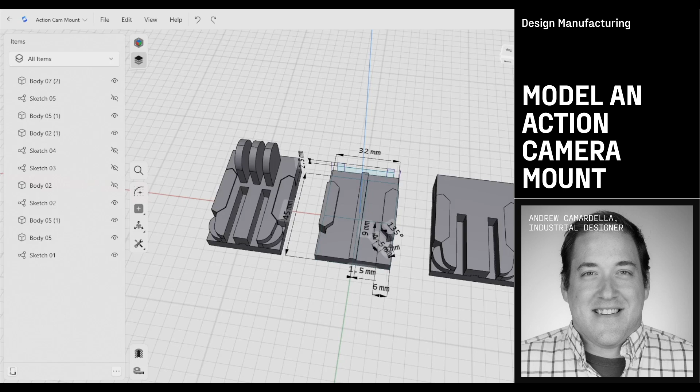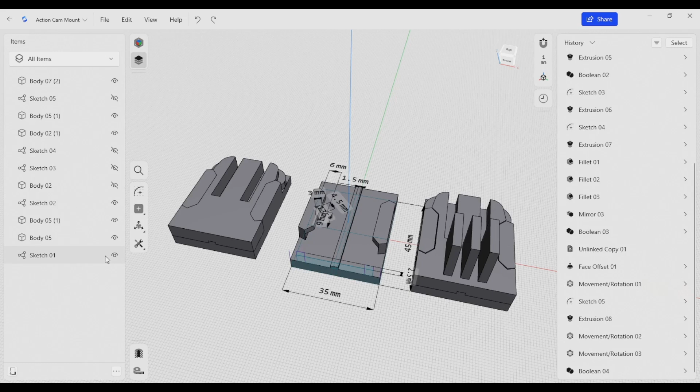In this video, we're going to take a look at setting up sketches to create an ideal 3D model that allows us to adjust geometry as we improve our model. We're also going to take a look at a few tools that have been improved or added since Shapr3D's latest update. To cover the main topics in this video, we're going to be 3D modeling an action camera mount.

Let's get started. We're going to start up a new file here. So we're going to need to start making our first few sketches to help define the overall part. We're going to focus a lot on sketches in this tutorial. We're going to try to make something that is editable, and that's going to allow us to alter the design overall as we refine it and as we decide we want to make changes.

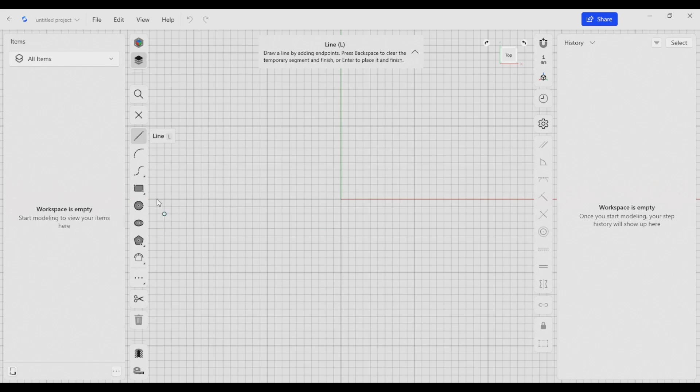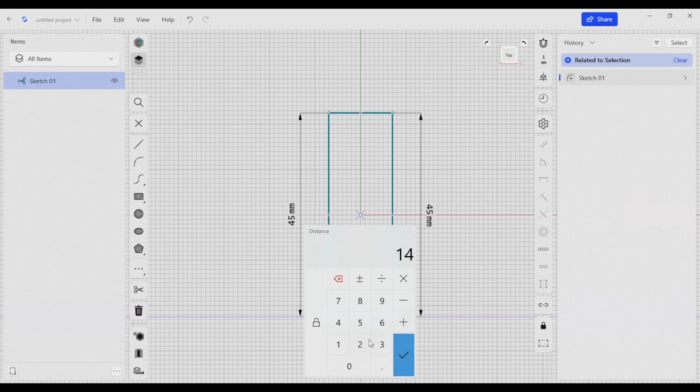The first thing I'm going to do here is start by creating a center point rectangle of the overall dimensions of our part. So I'm going to just really quickly rough out the overall dimensions, and these things are going to get refined over time. So I don't need to be super specific at this point. We're just setting up an overall sketch here to give us some good base models that we can start working from.

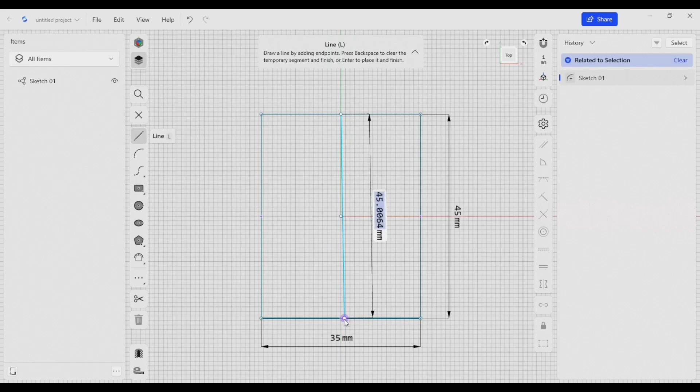The thing that we're working on is a two-piece camera mount. So there's a base component and then there's a top component that clips into that. I'm going to start building the base component first, and we have our overall dimension here. I'm also going to draw in a couple of other things like our center line. And I'm going to make something that's symmetrical, and that's going to make it a lot easier for us to edit as we move along. That way we only have to change dimensions in certain places when we're building this model out.

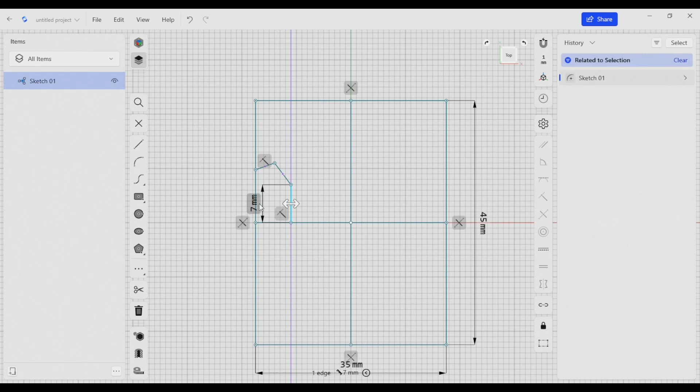So I'm just going to quickly rough in some dimensions here. This dimension here is 9 millimeters. As we move around, I'm adding dimensions. I'm also going to start adding constraints. Shapr3D does a good job of automatically adding certain constraints in. It makes our lives a little bit easier. I'm going to add a dimension here. We're going to call this 4.5. We're also going to click in here and call this 3.

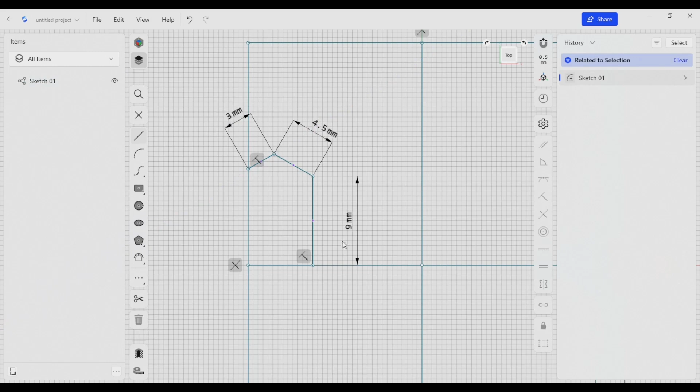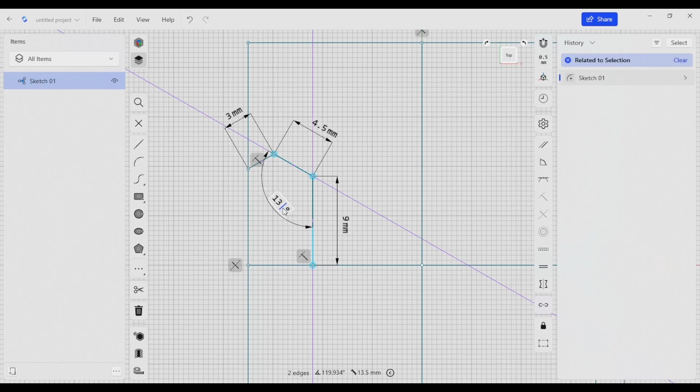One of the nice things about these new dimensions is that we can actually set which direction they're going in. So I want this to be a vertical dimension here, and that's just going to help keep things organized and in the correct orientation. One of the other things I want to do here is add some dimensional constraints for angles. So I'm going to make this 135. And you can see with that, I'm starting to get a little bit of skew here. So I'm going to just make sure that these dimensions are correctly located.

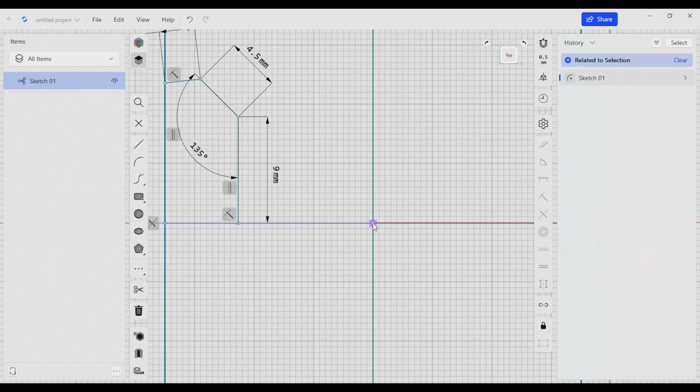I'm going to say that there's a vertical constraint here on this line. So I'm going to add a new vertical constraint here. And I'm also going to move this back to our center point. That right there is going to be 6 millimeters. And that completes that section of it. We're going to use our mirror tool once we create a solid to help us create this component.

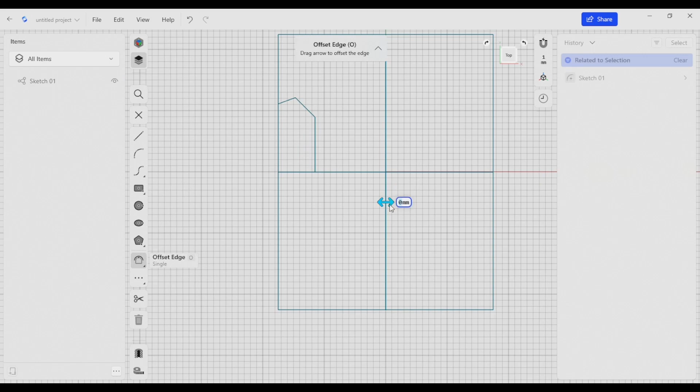I'm going to also make another vertical line here, and the thing that we can do is create an offset line. So I'm just going to click in the more. I'm going to create an offset edge, and I'm just going to slide this over and call this 1.5 millimeters. I want that dimension to stick around, so I'm just going to click and drag this here and enter. So now that dimension sticks. And that gives us our basic layout of our part.

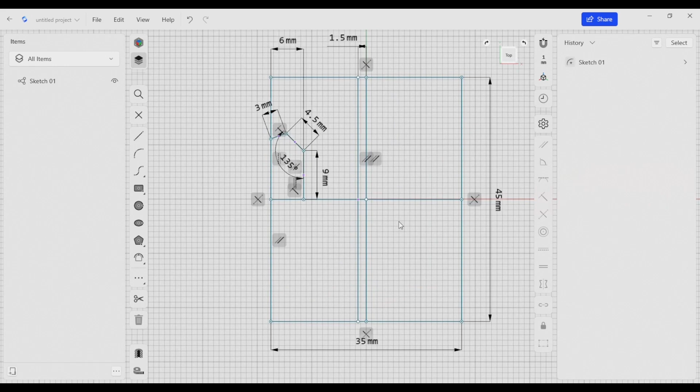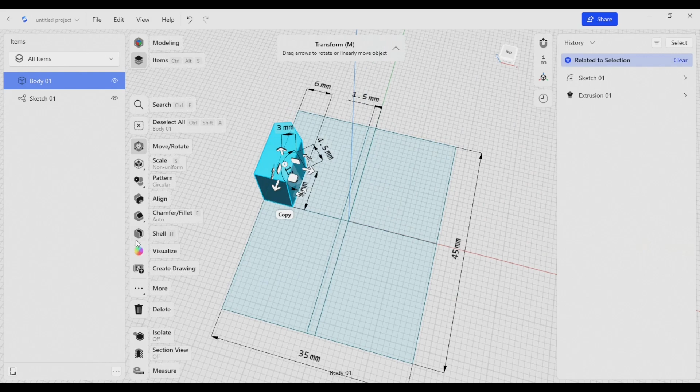So the very next thing I'm going to do here is start creating some solid extrudes. Now that I have these areas, I can click and drag them and move them around. So I want this height here to be a total of 11 millimeters. And I'm going to just take this part, and I'm going to make a duplicate of it by creating a mirror. I'm going to mirror along this face here. I'm going to click done.

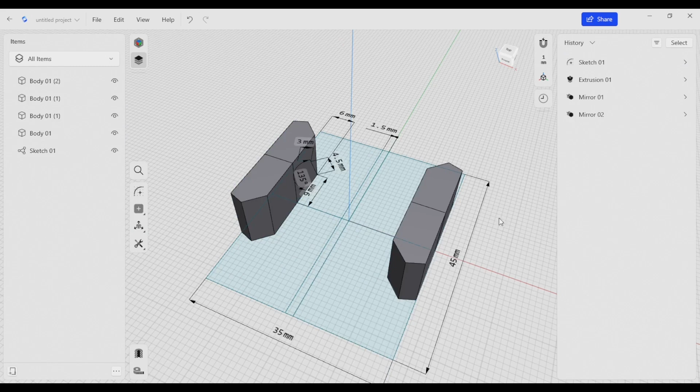And I'm going to mirror that one more time to mirror it across to the other side. I'm going to click on more, click on mirror, and I'm going to select this center plane right here in order to give myself some symmetry there. So now I have these 4 bodies, and they actually are all going to be the same piece. So I'm going to hold off to make them a union until I get this bottom section figured out. So I'm going to make a base plate that connects all those pieces together. I'm going to make that 4.7 millimeters.

And you can see now that we have 5 pieces, we're going to end up connecting all of those things together.

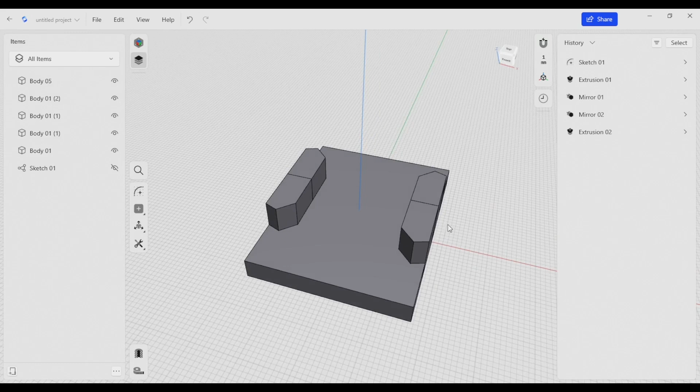The last thing I want to do here is also extrude another component. So I'm going to hide this last body that we made, and I'd like to make a little rib that goes through the middle of this component. I'm just going to lift this up here.

I'm going to call that 6 millimeters total height. So what I've done is measured from the very bottom plane and extruded everything up, and that gives us our total height. And what I'd like to do is also copy this and mirror this over.

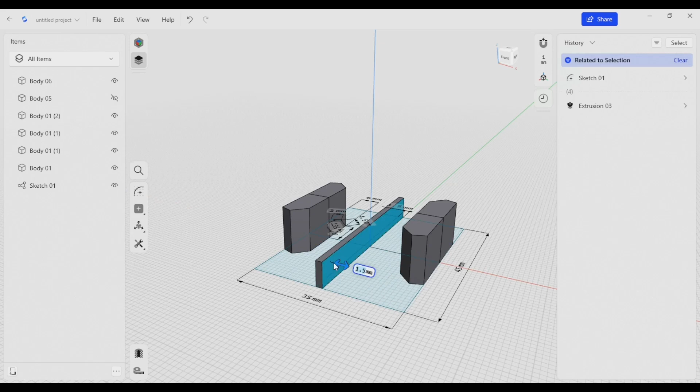So I'm going to use our history tree here to move some things around. I'm going to move this last extrusion before our mirror, so our mirror now is after the middle extrusion. And I'm going to add that extrusion to our target bodies. That way we get a nice symmetry with our components.

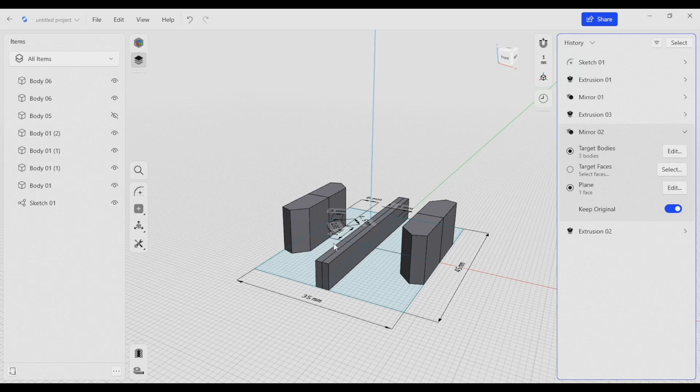That way if we change anything about the sketch originally, everything updates automatically. I'm going to bring our last extrusion back here, and that gives us our total design. So at this point, I can start booleaning everything together.

I'm going to select everything. We have our top panel there that allows us to filter what it is we're selecting. I'm going to just tab over and select bodies, and now I'm going to union all of those pieces together. Now we have one single solid body.

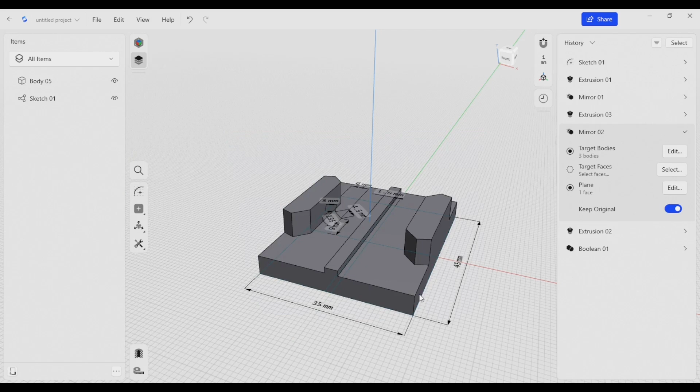The other thing I want to do here is to cut a little relief here that allows us to slide a clip in along this component. So I'm just going to really quickly create a new sketch on the end of this face.

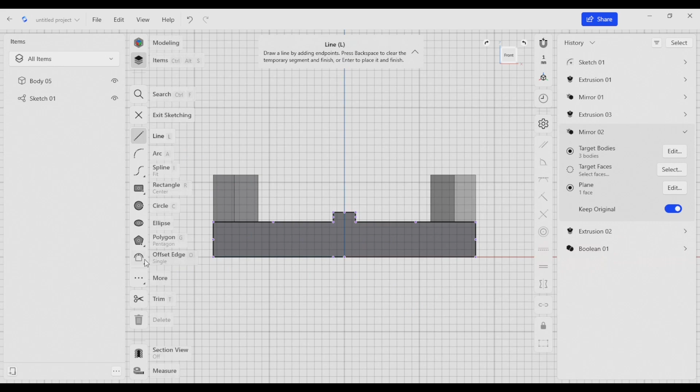And this is going to bring up one of the updated features of using the projection tool. So I'm going to type P for the projection tool, and that is going to allow us to include components into our sketches. I'm just going to select these tall pieces here. It's going to give us some reference points for some of the geometry I have to cut.

So I'm going to click done here. And you'll see that if we go into our sketch here, now we have our plane. We also have projected edges. And if we want to add more projected edges to the sketch, we can go back into edit. We can include more edges into that.

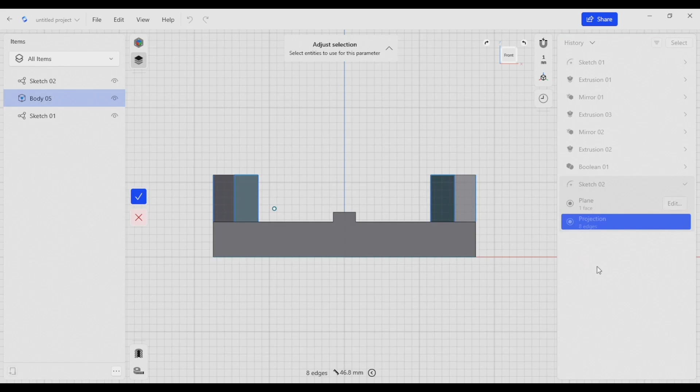So I'm going to use those projected edges now to create a subtraction. And I'm just going to get back into our sketch.

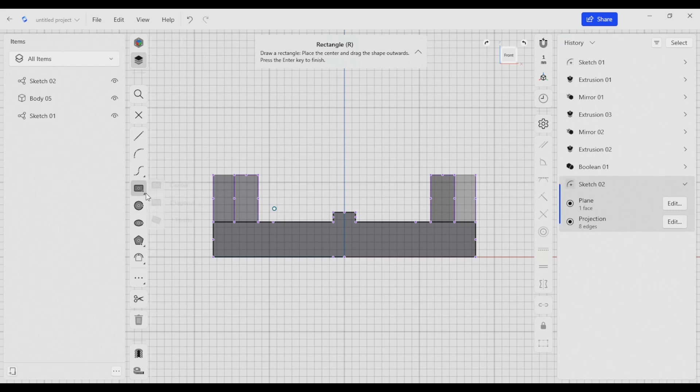I'm going to go back to our rectangle, and this time I'm just going to do a diagonal rectangle. I'm just going to click on this line and come all the way across to this edge here. We're going to add a dimension that goes from this edge here to this edge here. We're going to make that 2.5 millimeters.

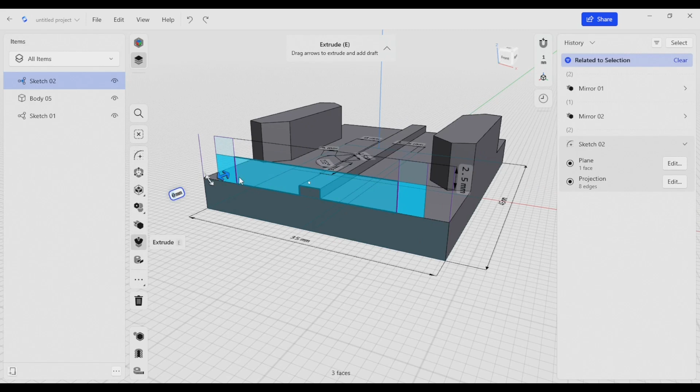And with that, what we can do is click these areas here and use that as a way of cutting through this part. We're just going to subtract those areas there, and that's looking pretty good.

So from here, what we can do is hide this body, and I'm going to start working on the new component that we're going to use to mate these two pieces together. And I know that the overall height of the part right now is 11 millimeters, so that's going to work for us right there.

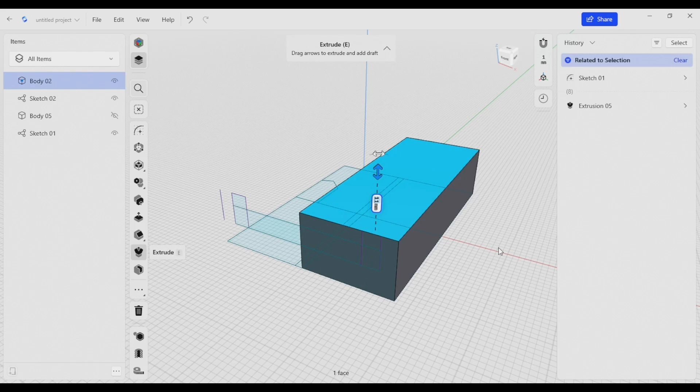I'm going to click OK. And from here, I can bring back the body that we've been working on. And we can do a subtraction between this new component that we've made and the solid that we've created before.

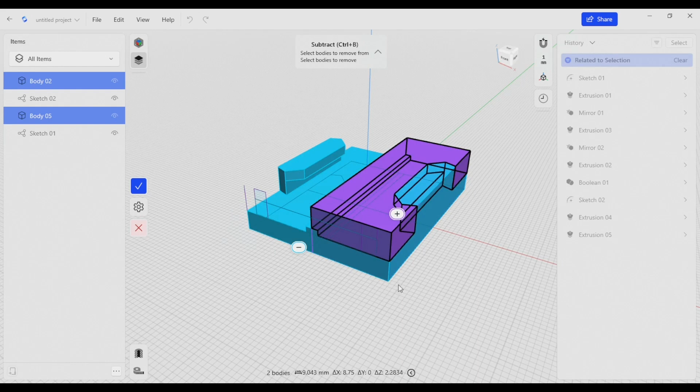I'm going to do a subtraction like this. And I'm going to make sure that I'm going to keep the bodies that have been removed from their original components. And that way we get a positive and negative piece that fit together. And we're just going to click OK.

And now we have these two pieces, and we know that they're going to fit perfectly. So I'm going to hide this piece here because we no longer need it for our purposes.

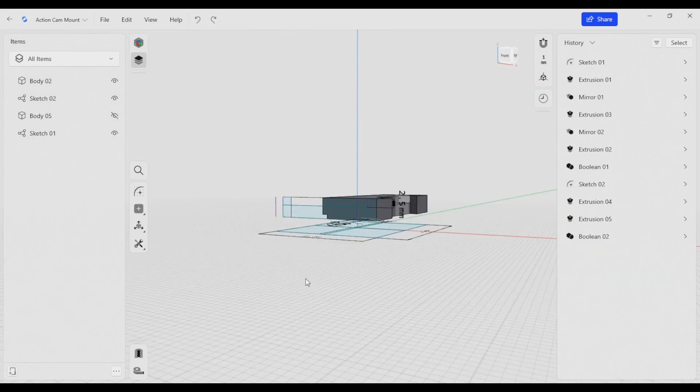The next feature we're going to create is a slide release spring out of this component here by removing some material. And the first thing I'm going to do here is start a sketch on the very top surface of this part. I'm going to remove a long slit through this surface, so I'm just going to create that with a couple of lines.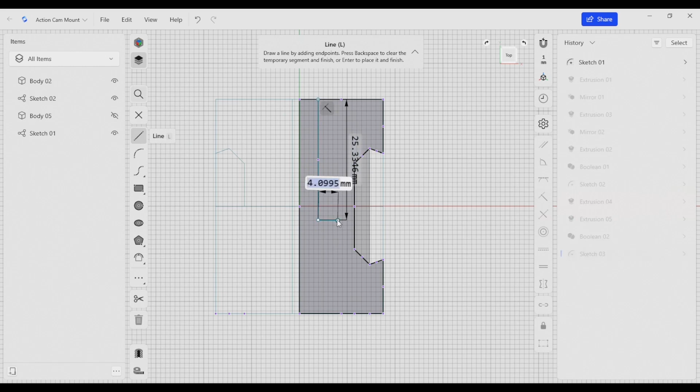I'm also going to thin this material here by cutting away a little bit. I'm going to first project up this surface, clicking P and selecting that surface. Then I'll create a line that cuts away a little bit of this material.

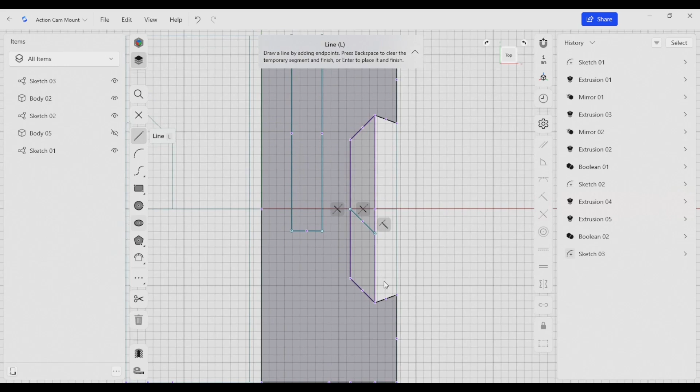The rest is just creating constraints. I'm going to select these two lines and make sure I have a consistent angle, 45 degrees works. I'll also create a dimension here, making this 4 millimeters, and make sure this is a consistent distance away. Selecting these two edges, I'll make this 3 millimeters, and make sure these edges are horizontal and perpendicular by selecting horizontal and vertical.

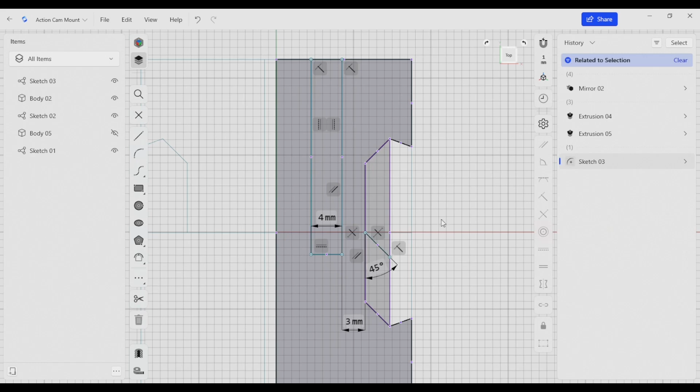Now I have some more areas I can use to extrude away material. I'm going to select these two here and extrude all the way through the object. So now we have a thin section here that should spring out of the way and allow us to create that slide buckle feature.

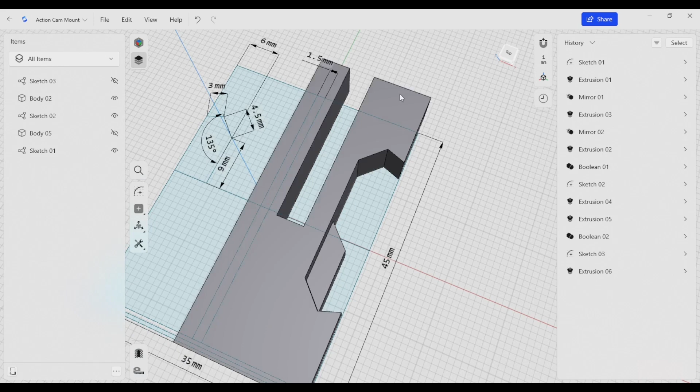Another thing we need to do is cut away a bit of this surface so it slides under the detent in this body. If I hide this, we want that part to slide underneath of this detented area here. I'm going to bring that body back.

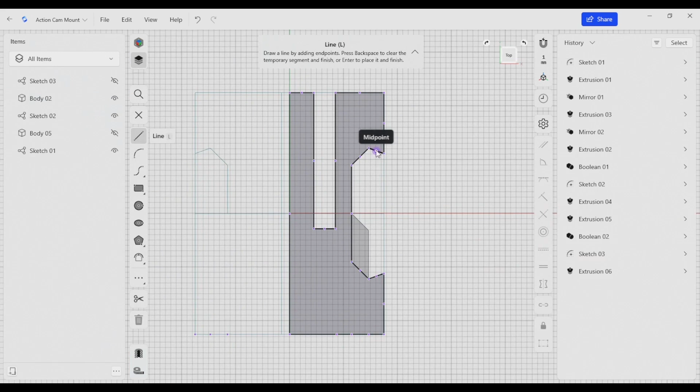I'm going to cut away this by creating another sketch, drawing a line vertically right here. I'll select this line and actually tilt this edge in a little bit so we have some ability to connect these two pieces together, and this part will kind of ramp off that detent and slide underneath.

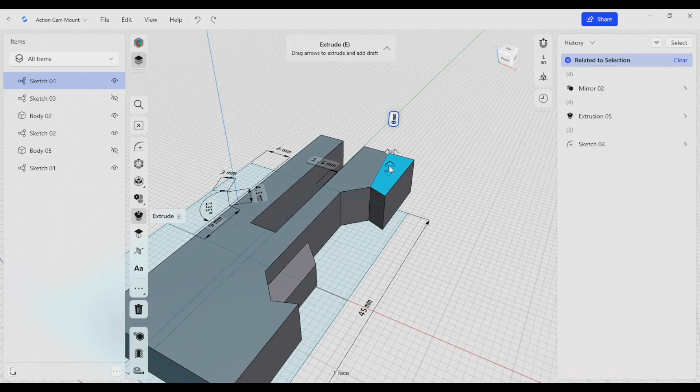I'm going to select this area here and drag this down, making it -3 millimeters, like that. It should be below this edge over here, which is kind of the maximum height of that detent. That should work for us just like that.

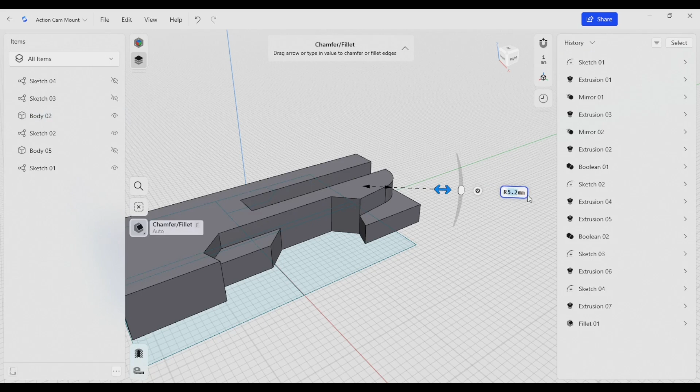I'm going to make a little bit of relief here by selecting these edges and putting some fillets on them, just so it slides past that detented area. I'm going to make this a 5 millimeter fillet. I'll fillet this edge here and make this 7 millimeters.

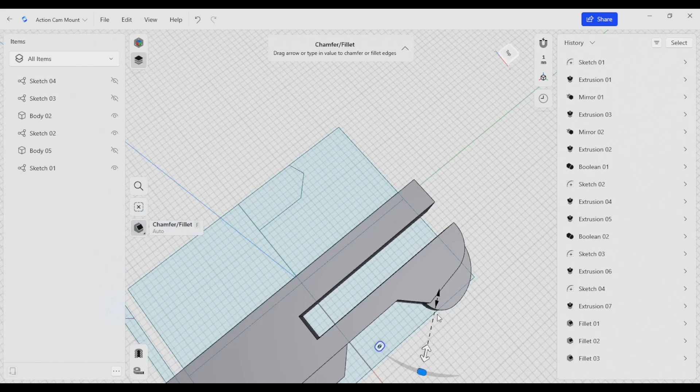I'm also going to fillet this front edge here and make that 3 millimeters. So this is now a nice smooth curved area, and that's going to slide underneath of that tooth that we have on the base plate. We can take a look at that in just a second.

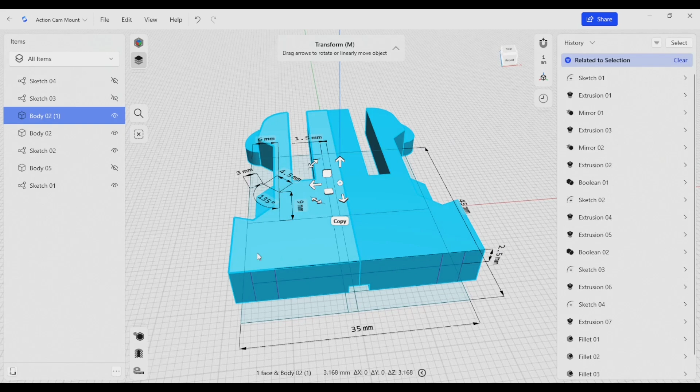I'm going to duplicate this component using a mirror. I'll mirror that, select my mirror surface, click check. That's done. Then I'm going to double click both of these and do a simple union so I have a single piece, just like that.

Then we're going to check this against our base plate. I'm going to turn on the body that we have, and you can see that everything fits perfectly there. I'm just going to slide this back so we can double check a couple things.

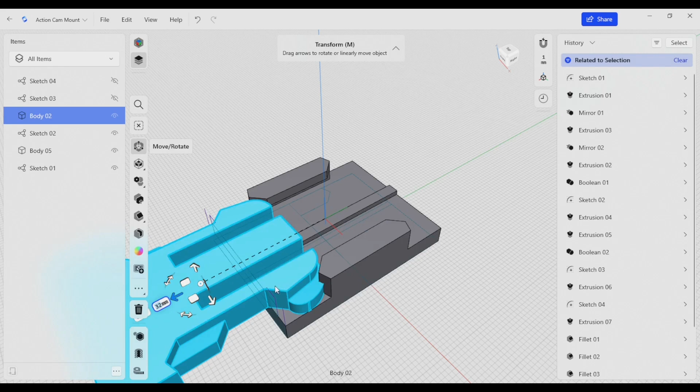As this circular tooth here engages this base plate tooth, this section will kind of spring out of the way and pass through this base plate. So now we have a finished action camera mount, and I'm just going to undo to remove those movements I just put in by sliding this part around.

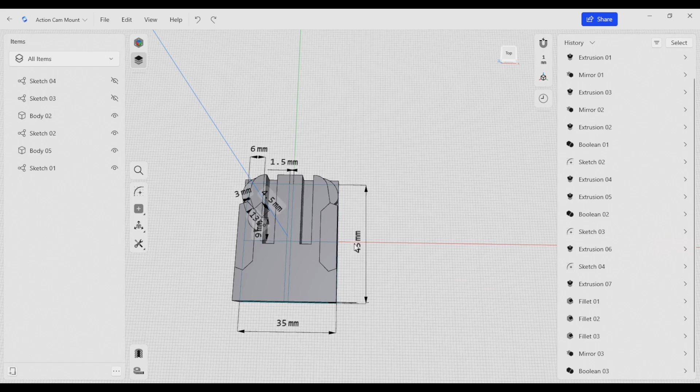The remaining thing here is really just making variations and cleaning this up. The concept overall is complete. So the thing we need to focus on now is cleaning up certain things like fillets and smoothing out corners that might otherwise be interfering, and also giving a little bit of extra room for relief.

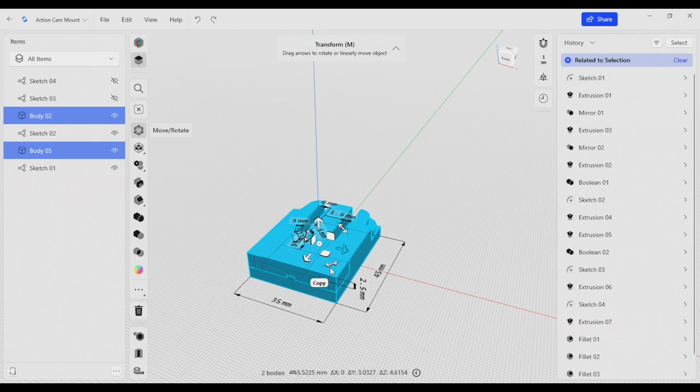One of the things we can do is save our progress here by using the new copy tool. So if I select both of these components, I'm going to make a copy of them and unlink this copy. At this point, this copy is going to be frozen. It's not going to update anymore if I change any of these dimensions.

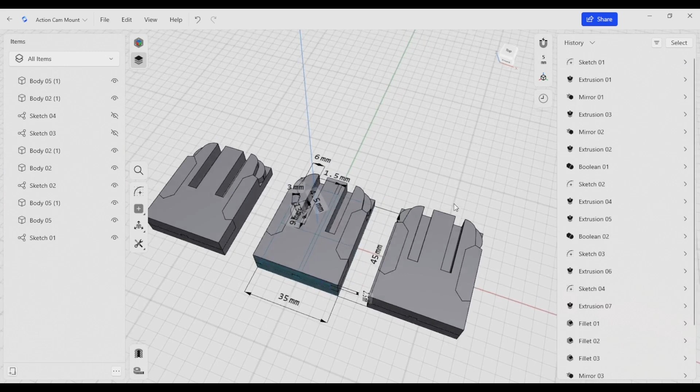Likewise, if I double click all of these, I can create another copy. This time I'm going to leave it linked. I can slide this over, and now I have a copy that's going to update with that original component. So I can start working on variations now, adding different mounts or types of connectors or variations of this original part. And when I change this original body, everything down the line is going to also update.

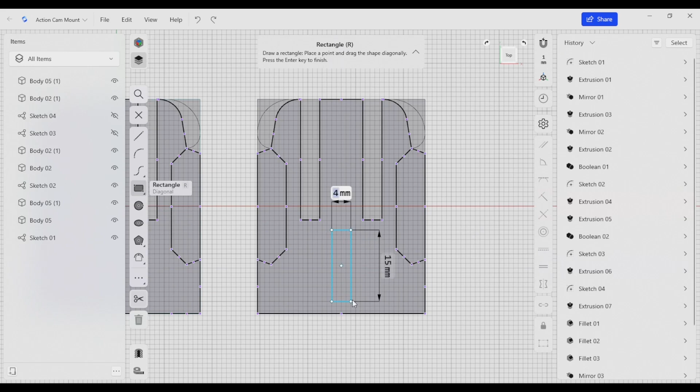As an example, I can create a sketch, and I'm just going to create a simple mount for this connector. I'm going to draw a rectangle here. I'm going to make this upper dimension 4 millimeters, and this 15 millimeters, so I have 2 dimensions there.

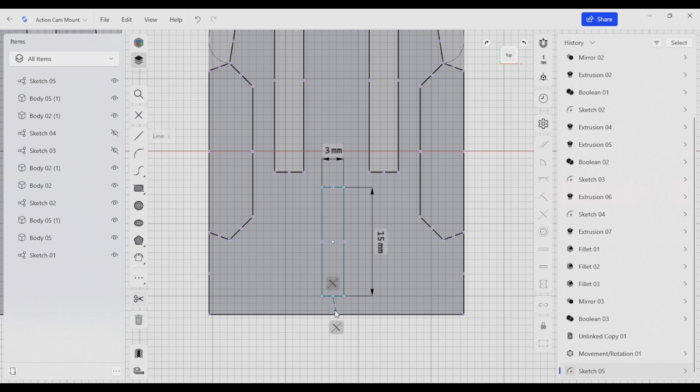I'm going to also add an extra line, so I'll type L and select these 2 points. What I can do here is select this line, turn it into a construction line, and also make it vertical. Now I have a centered rectangle, and I can use this area to create part of my mount.

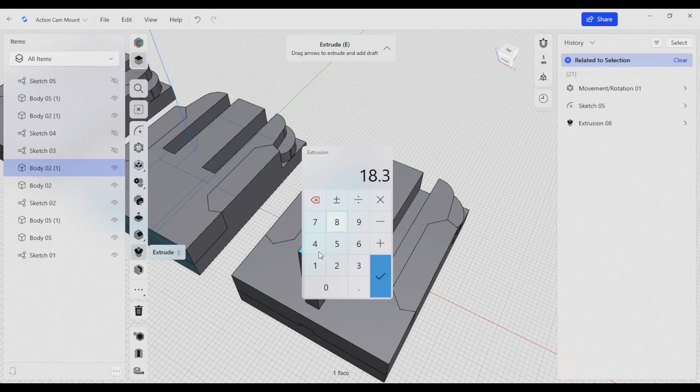So I'm going to select this area, type E for extrude, and bring this up to 18.3 millimeters. Just like that. I'm also going to make sure that this is a new body, and the benefit here is I'll be able to move this part around.

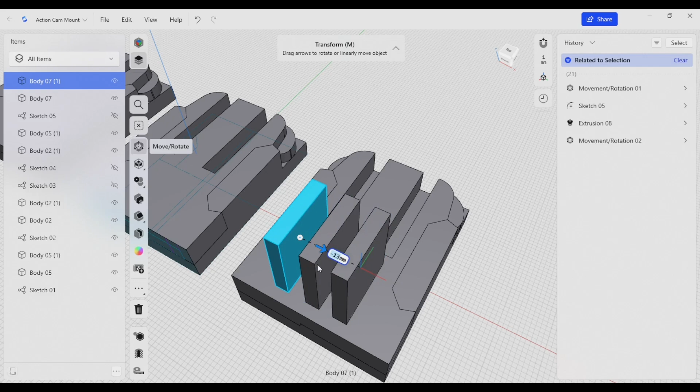I'm going to create a copy and move it 6 millimeters this way. And I'm also going to create another copy and move it 12 millimeters this way. Just like that. Now I have a new mount, and I can do variations on that as well.

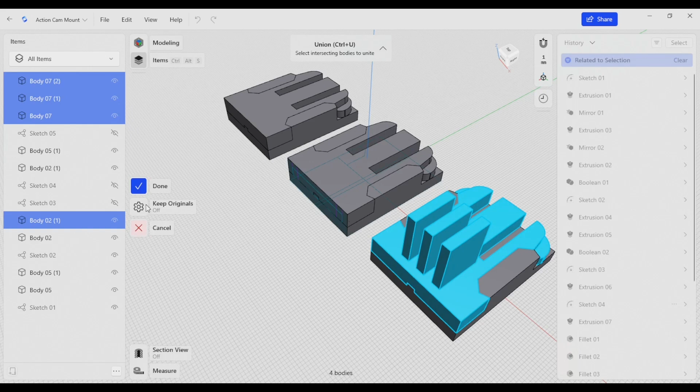But the benefit here is that once these are all connected, I have a new body that I can move around. I'm going to union those together, and I can start making edits to that and building more features.

So there's a few benefits to the linked and unlinked bodies. The unlinked body is going to be over here. It's going to kind of be our history, and it's not going to change.

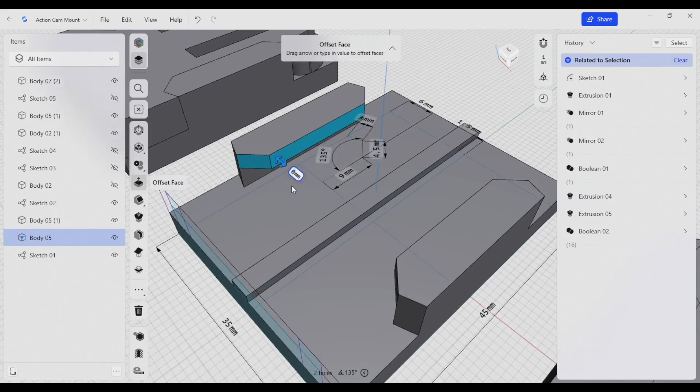The other thing I can do is come in here and start to modify this original component. So I'm going to hide this body, and I can select these surfaces here. If I wanted to add a little bit of relief, I can push and pull those surfaces to get a little bit of extra space for those components to fit together, depending on the manufacturing process. Right now they're very close together, so you're going to get a lot of binding in those elements.

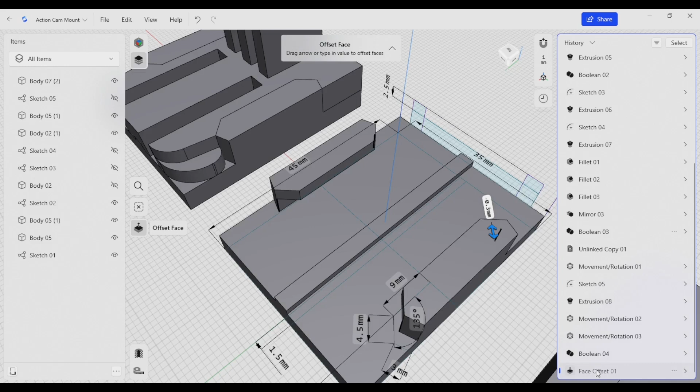So I can just add a little bit of relief, and I'll give it 0.3 millimeters, just like that. What I'm left with is a face offset right here. That didn't update yet, but if I take this face offset and move it before I made my copy, then everything down the line will update. So you see that I moved the face offset before my movement rotation, and now my update happens in all the downstream models, and my original unlinked copy still doesn't have any of those features added into it.

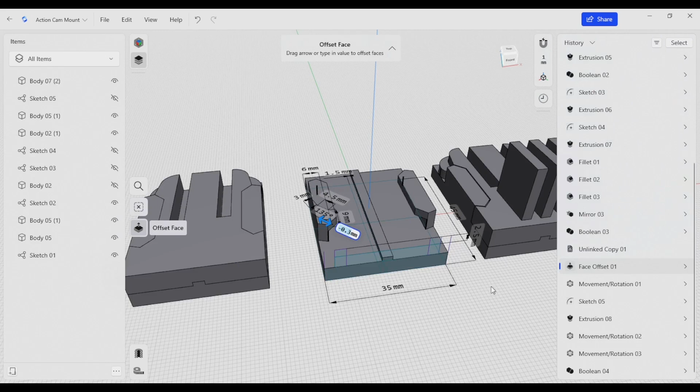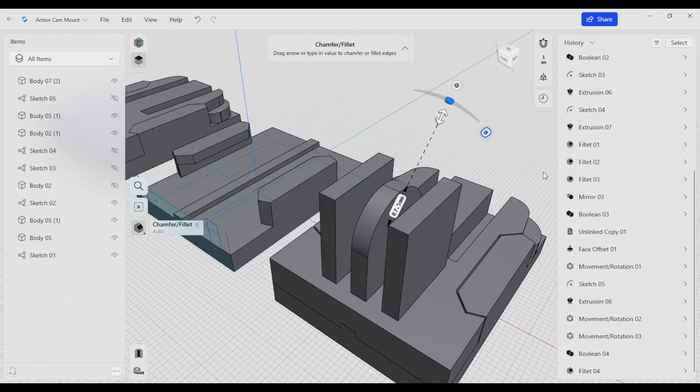Likewise, another thing we could do is we made these bosses here, and right now they're squared off. If I wanted to round them off, I could come in here and round these corners over, and I'm just going to give them a fillet. I know that that's 15 millimeters, so I could do 7.5, just like that. Again, I have a fillet that's here. If I bring it before my movement rotation, then all of the downstream items are going to update.

And finally, one of the most powerful features is that I can come in here and also change the original sketches. So if I change this to 32 millimeters, everything downstream is going to also update. It's a really useful tool to have access to, and you can see that our original model here hasn't updated at all. It's unlinked, and we can continue to revise and make edits, and I can continue to make copies of this piece and add different features as we go along.

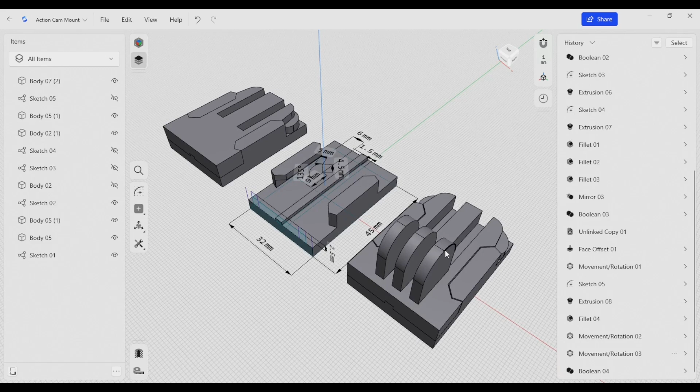At this point, these parts would be ready to make a quick prototype of, and using validation tools like 3D printing, we'd be able to see what changes we need to make in order to improve these parts.